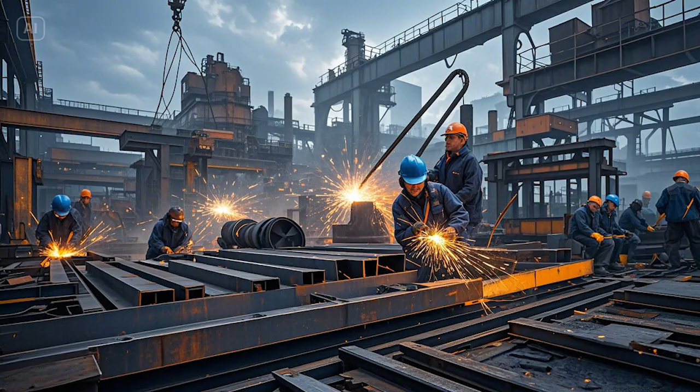Before carbon fiber was invented, materials like steel, aluminum and titanium were used in satellites and spacecraft. These materials, although stronger, were heavier in weight. This increased the weight of spacecraft. When the weight of spacecraft increases, it needs more fuel to escape Earth's gravity. When spacecraft and satellites started to carry more fuel, this again increased the weight, thereby creating a cycle which ultimately led to the increase in cost of launching spacecraft and satellites. Moreover, when the weight increases, it makes the pilot's job of maneuvering and controlling the aircraft difficult.

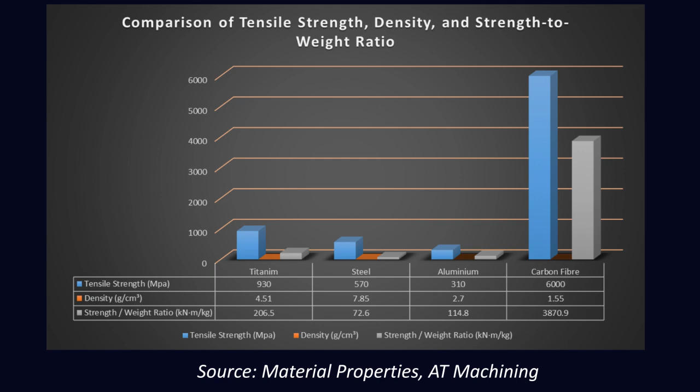This is where carbon fiber comes into play. Carbon fiber's strength to weight ratio is 18 times that of titanium, which is the highest of all three. So for every kilogram of carbon fiber used, it can handle more stress and load without difficulty. This is why companies like NASA are using carbon fiber in their spacecraft, and brands like Ferrari and McLaren are using carbon fiber in their Formula One cars. In fact, the SF24 launched by Ferrari in 2024 is made of 61% carbon fiber.

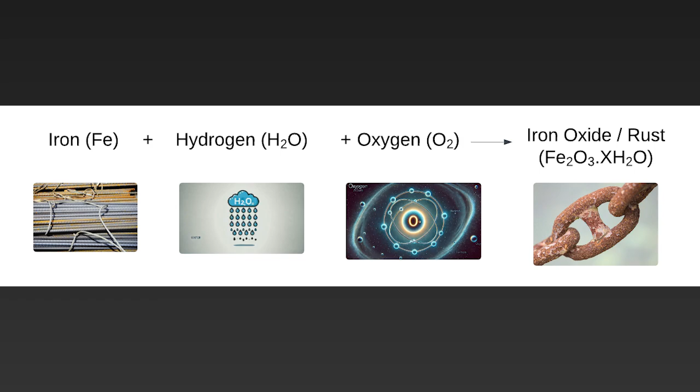Corrosion is a silent enemy in the construction and automobile industry. It weakens critical infrastructure such as bridges, buildings and roads, and it affects a vehicle's performance, aesthetics and safety. Corrosion is a natural process whereby materials like metal react with air, water and chemicals, degrading their quality. For example, steel reacts with oxygen and water, forming iron oxide on the surface. This iron oxide or rust not only damages the aesthetics of steel, but it also affects the load-bearing capacity of the structure.

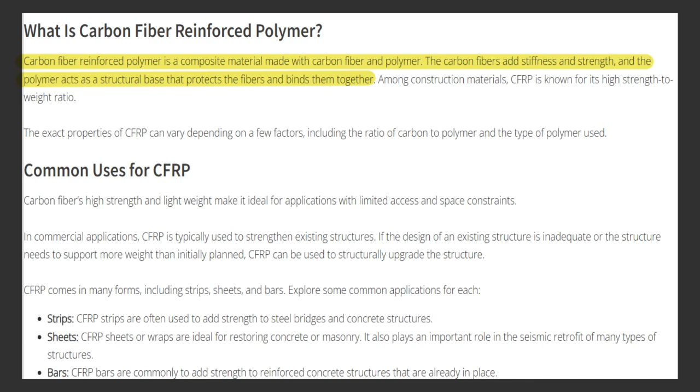Carbon fiber, rather than being made of metals, is made of carbon atoms arranged in crystalline structures. This is what makes it rust resistant. Hence, in building maintenance and retrofitting industries, CFRP or carbon fiber reinforced polymers are extensively used. CFRP is a composite material made of carbon fiber and polymers such as epoxy resin. These polymers hold carbon fiber together, making them very strong. Carbon fiber wraps or strips are applied to the surface of steel and concrete structures. They prevent the environment from reacting with the structures underneath, making critical structures such as beams, columns and foundations rust resistant.

In design, flexibility is very important. Most of the products that are created are never used as they are. Rather, they undergo several modifications in order to fit the client's needs and the designer's vision. While aluminum, steel and titanium have higher strength, their flexibility is often poor. Excessively bending any of them can damage or deform the material. On the other hand, carbon fiber has a higher strength to weight ratio and exceptional flexibility. The best example to demonstrate this is the design of aircraft wings. While steel is more rigid and aluminum is less strong, carbon fiber is the best material to design this.

Engineers can create wings which are structurally strong in order to resist all the stresses and yet fit the designer's vision. This is why wings of the Dreamliner 787 from Boeing were designed using carbon fiber. In fact, the company has claimed that using composite materials has increased their fuel efficiency by 25%.

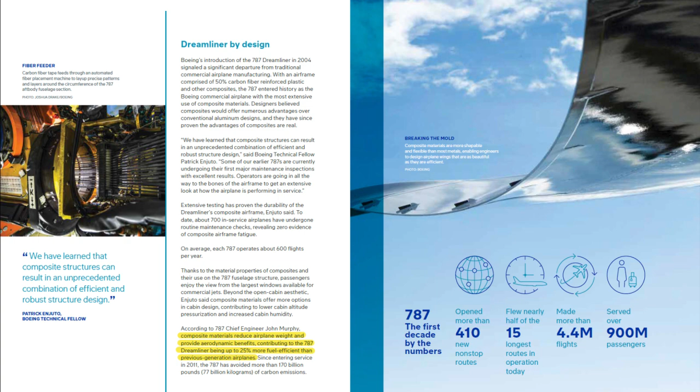So these features such as high strength to weight ratio, good corrosion resistance and increased flexibility, along with other advantages such as high stiffness, good fire resistance and increased conductivity, make the material extraordinary. But if carbon fiber is exceptional, then why are all companies not using it? There are three disadvantages of using carbon fiber. The first one is the increased cost.

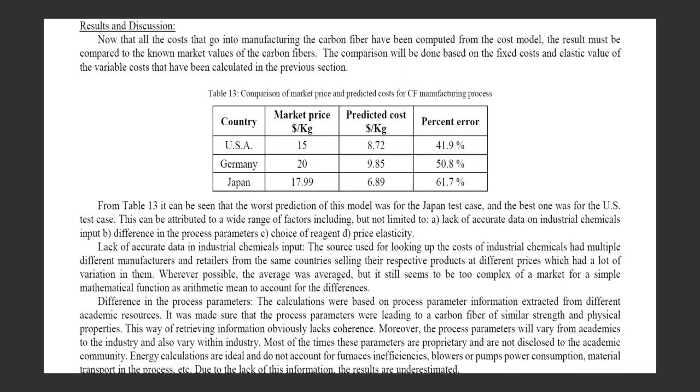Manufacturing carbon fiber requires specialized equipment and manpower. Apart from this, epoxy and resins used in composite materials add up to the cost. For instance, to manufacture carbon fiber in the United States, it takes around $15 per kilogram. In India, on IndiaMart, while traditional TMT rebars of 24 mm diameter are available at 50 to 60 rupees per kg, FRP rebars are available at 180 rupees per kg, which is 3 times the price of traditional rebars.

The second disadvantage is the environmental concern. During the manufacturing process, at each and every stage, carbon fibers require intense energy. Moreover, CFRP is made of composite materials involving carbon fiber and resins, which are bonded together very strongly. Their bond is so strong that it is very complicated to separate them. Hence, recycling and reusing this material is very complicated and difficult. This leads to an increase in waste buildup.

The third disadvantage is the brittleness of the material. Steel and aluminium can deform permanently under excessive loading. This is known as a warning sign before the material breaks completely. In engineering terms, it is called plastic deformation. Carbon fiber lacks this plasticity, hence under sudden and excessive load, it can break apart suddenly. So while higher strength to weight ratio, good corrosion resistance and increased flexibility make this material extraordinary, disadvantages hinder its ability to be used by industries worldwide.

But the question here lies, can something be done to address these challenges and make carbon fiber affordable yet environmentally friendly? There are a couple of steps taken in this direction. Firstly, efforts are being made to automate the process of production. If this is done, reliance on manpower will reduce, waste buildup will also reduce, and efficiency will increase. Additionally, experiments are conducted to replace the traditional raw material, that is polyacrylonitrile, with a new raw material known as lignin, which is much cheaper.

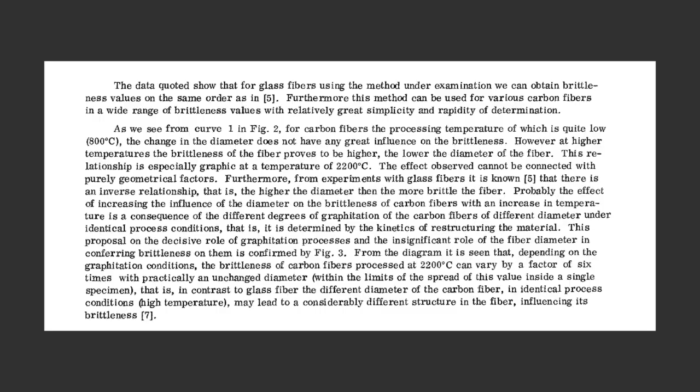Secondly, as it is very difficult to separate resins from carbon fiber because of their strong bond, biodegradable resins have been adopted. These resins have special structures that break down under certain chemical conditions, making the recycling process much easier. Regarding the reduction of brittleness, a couple of studies have been done. For instance, this author has examined the impact of temperature used in processing on the brittleness of the material. When higher temperatures are used in manufacturing stages, the brittleness of the material increases.

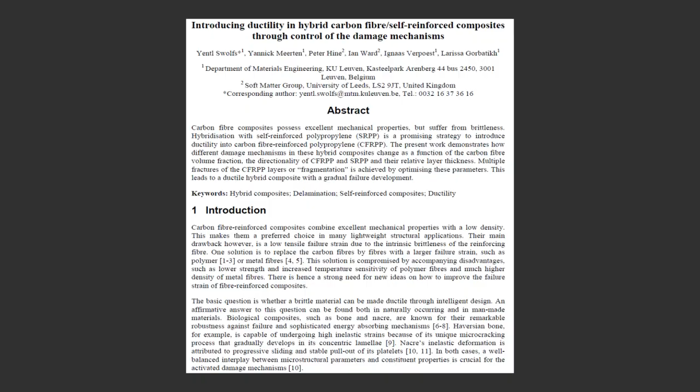Secondly, the author of this research has proposed that in order to reduce the brittleness of carbon fiber, it must be combined with a material which is very ductile in nature. Herein, he has proposed that self-reinforced polypropylene should be used, since it is very ductile in nature. So combining ductility with brittleness will reduce the overall brittleness of carbon fiber.

So to conclude, higher corrosion resistance, improved flexibility and higher strength to weight ratio combined with other features such as good thermal conductivity and good fire resistance make the material exceptional. Although carbon fiber faces challenges such as higher cost of production, environmental impacts and material brittleness, these can be overcome by automating the production process, using biodegradable resins, and using composite materials such as self-reinforced polypropylene.